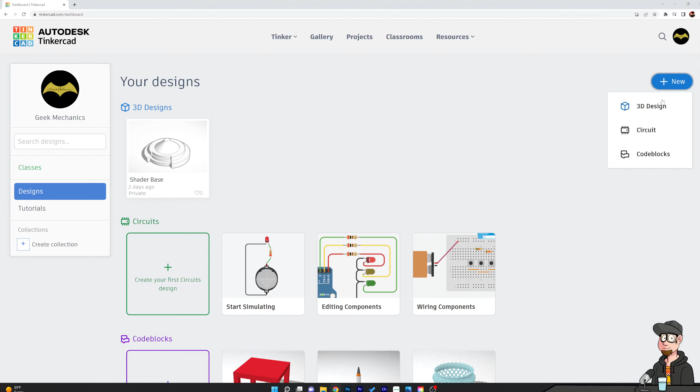All right, cool. So the easy thing with Tinkercad is there's a big blue button over here at the top upper right, and you just hit new, and we'll say 3D design, and you're right into the program. It looks like it's built for middle school. I think that's actually what they introduced this as.

But this actually has some really good functionality to it, and there's some advanced features. It's way easier than something like Blender, and once you get probably 5 or 6 concepts in Tinkercad, you can make almost anything. I've made so many complicated things in this. Then you take it and export it as an STL, throw it into Blender, and you can make something look really cool.

So, we can get into that too. I can show you guys how to do that so you can take cool shots of the models and stuff you make. But essentially, here you have a work plane down at the bottom.

You can go to settings and go to your units. Your units tab is probably set to millimeters. I have mine in inches, so if you want to follow along, you can switch yours to inches as well. If you're into Legos, you can go to bricks. I won't cover that, so just make it the default and close that out.

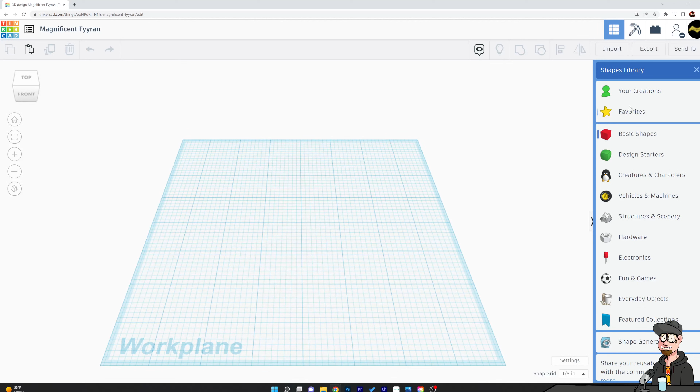And everything, for the most part, shape-wise, is going to be over here on the right. So you have your basic shapes panel, and then you have a drop-down menu that has a bunch of other options in it as well. This is where you're going to select all of your shapes, and we'll start getting into that. But for right now, we'll start with basic shapes.

And you have over here on the left, which is kind of important, your different views, your home button. You have this orthographic mode, which is really helpful, especially when you're trying to do stuff that would require math or lining things up. We'll get to those, you'll see me use them. If you have a question, drop it in chat. But if you've used Blender and other CAD systems, you will jump into this pretty easily right away.

So the big thing is, everything is a shape, right? So when I'm starting off, I'll look at something and go, oh, this is a door. I'm going to use a rectangle, and a circle, and this. I just break it down into shapes. And we'll start doing that by just grabbing your first shape here, which is just a square.

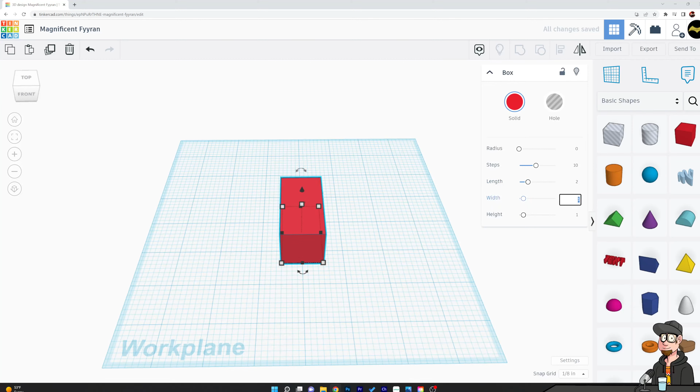You'll see the menu for this over here on the right that pops up is you have radius, steps, length, width, and height. You can set all of this by either using the dragger here, or you can click in there and type too. So we can go 2 by 2 by 0.5 to start off.

You can also grab these individual squares and move it that way as well—corners, etc.—we'll drag everything. If you want to enlarge the whole thing, you grab this top one, hold shift, and shift up, and it will do it proportionally with everything. Super handy and helpful to know.

Beveling isn't really an easy thing to do in Tinkercad. There's not really a way to bevel unless you're using this particular model, the square. How you can do that is set your radius, and then use the number of steps. As you zoom in here, you'll see that we can actually see a small bevel on the sides.

So just keep that in mind if you're looking to bevel something. Obviously the bigger the radius, the bigger you'll see your bevel. There's other ways to do that too, obviously, but that's the gist of it.

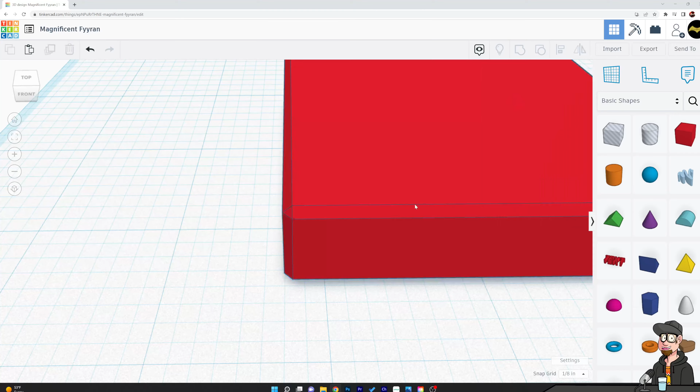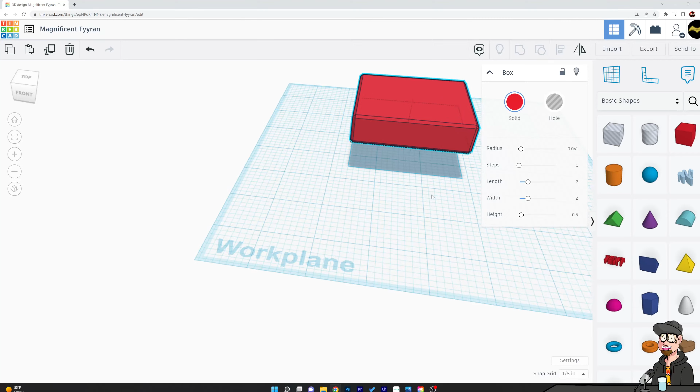That's how you bring in an object to move it around. You right click, select it, and just right click it, move it around. You have this workplane, which is basically your zero plane, and if you move something up and want to get it back down to 0, you can just hit this little button over here. When you start seeing these things right here, you got this 5/8, you got 0. You can just start moving this back down, or you can just hit 0 there, take it back down to the floor.

The big thing with Tinkercad is Boolean cuts are really easy, but you don't have many options, or at least it doesn't appear to. But let's say we wanted to put a square right in the middle of this. You would grab this square that looks like it's got the little lines through it, and they call this a hole, I believe. Just a straight up hole. And it does exactly what you think it would do.

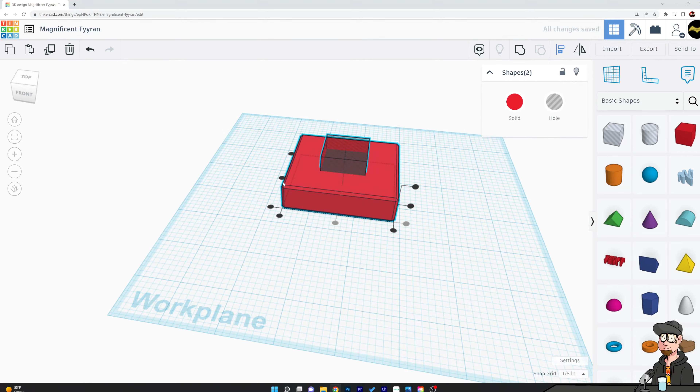If we pull this into the middle, let's say you want to line this up, dead center in the middle. Just grab both the items, go up to this align button right up here, click on it, select your middle, and now we have that lined up. The other thing we can do is go to this view, go to our top, and we can see that we're totally lined up.

To move the screen around without having the angle changed, you can use the middle mouse wheel. That's the easiest way to do it. Or you can also use shift and the right mouse button. I just use the middle mouse though.

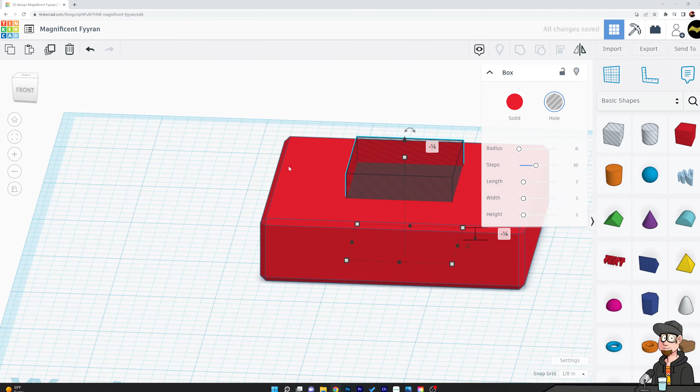Let's go ahead and make a hole in this. You can see that we're coming up through the bottom, but I always like to make sure that the cut is gonna really be a true cut all the way through. Pop out of that mode, grab them, and this is how you would make a cut. You go up and hit the group tool right here, Control plus G, or just hit group. There you go, there's our first cut.

How's that feel? Any questions on that?

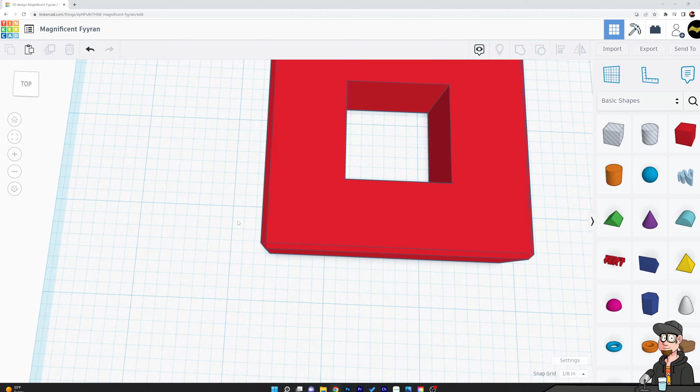Let's go ahead and delete this one. You just click on it and hit delete. And now let's actually make something. Let's make a floor piece, like from a Batcave or Cyberpunk or sci-fi or something.

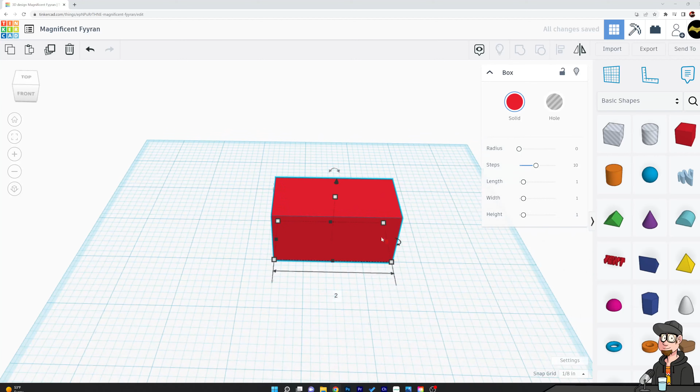I would start with creating a box. Let's move this to 2x2. Again, you can do that by dragging it up to 2, or you can just type it in there, either way. And then let's bring this down to probably like 1/8.

I'll show you a couple ways. Like I said, there's just like every CAD program, a million different ways to do this. Just because I do it a certain way doesn't mean it's the best way to do it. It's just how I do it as quick as possible. Honestly, that's my whole thing, I've just found the ways that work the fastest for me.

But let's say that we want to make this. Actually, I'm going to increase this a little bit, go back up to 1/4.

Let's say we'll make this into a floor panel, and I want the corners to be cut, because there's no way to do that in this program, you have to cut it. So I'm going to bring in this box tool and the box hole, set it there, and these little arrows here are ways to rotate the cube around. So when you want to rotate the cube, you can click it and get into the number, and I could say 45.

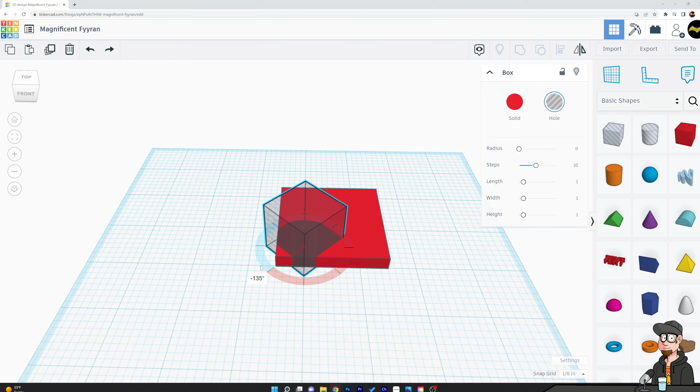I get a 45-degree angle that way. Or you can drag it, and if you hold shift, it'll snap to 45 degrees as you go. You can do that for every direction, X, Y, and Z.

I'm going to move this back, somewhere around something like this. Let's look at that. That's not very big. One of the problems is right now it's snapping to 1/8, so I can't really get it the way that I want it.

If you run into that, you can tell the program to snap in a different scale. So I can say, let's snap in 1/32. Now you can see when I move it around, I have much more control of how I want that to look. So just eyeball it however you want to make it look.

And then you want to make sure that it's centered and all of that, so you get even cuts. But I'm going to go for there, and I'll show you the trick that I use to do this on all four sides. There's two ways to add an object in Tinkercad.

You can duplicate it, or you can copy it. If you copy it, it's going to move it to a different location. Like if I control copy this, Command C and then Control V, it moves it. If I just use Command D, it's going to place it exactly where it was.

So I'll do that. I did that once. I'm going to do it again. So there's 3 copies there now. I'm going to do it one more time. And now there's 4 copies there, and I'll show you why.

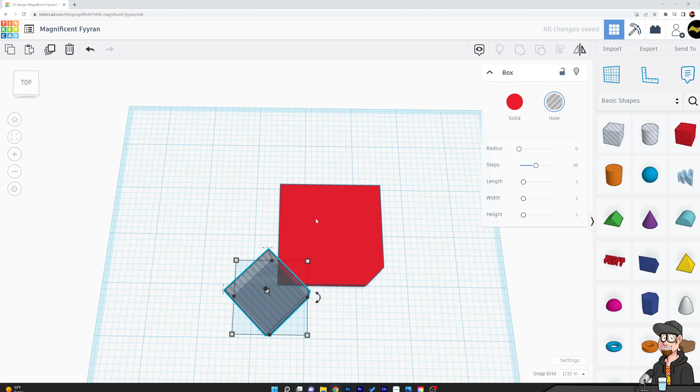Now I'm going to shift this box rather than messing with all the cubes because it's a little bit easier to control. Now I'm going to take the next box, select the red platform again, and do the same thing.

And I'm going to do that again. And one more time. This time, what we've done is we've guaranteed that they're going to be the same cut, as we don't have an alignment issue later on.

I don't love math, so that's the way that I do it. You can bring the ruler out and get into using the work plane, and I'll show you guys that, but probably down the road. I know the best way that I learn is just making stuff and figuring stuff out, so I just want to get you to where you guys can start playing around in this.

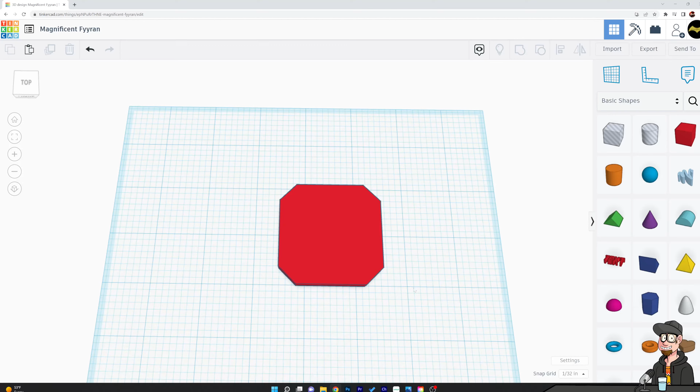So now we have this shape, and let's make it interesting. Go ahead and grab or click on this, select it, and then duplicate that, Control D, and we're going to bring it up above, and we're going to turn this into a hole.

Now we're going to select this top box. So you got your four sides, 4 corners. This top box is going to let you make something taller or whatever. But what we want to do here is we want to shrink this whole thing in.

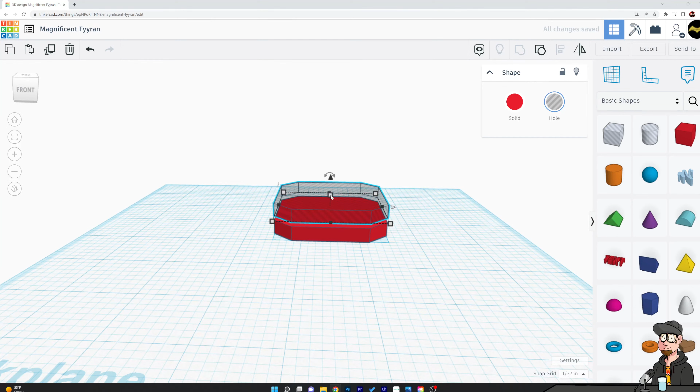The way to do that is hit Shift and select that box and drag down once till we get something like this. So we go to our top view. Perfect.

Now let me jump out of there. Oh, by the way, if you ever get really lost, the home button is really good at just getting you right back. Super handy, especially when you start having tons and tons of models on your work plane.

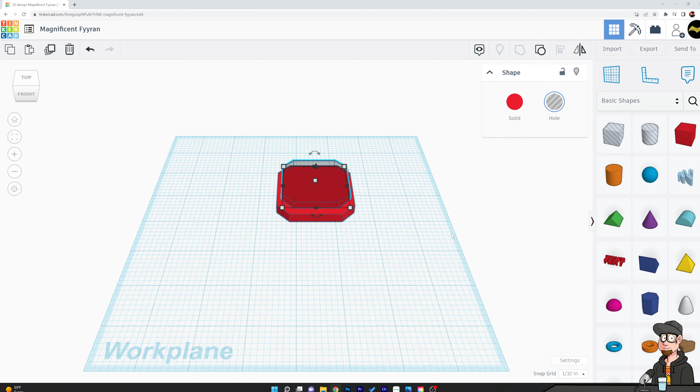All right, so now we have this. Let's go ahead and drop this in a little bit. It's kind of difficult to see. That's one of the disadvantages of Tinkercad, is you can't really see how far you're going in.

You can see it via the numbers. You can tell, hey, I'm dropping at 1/32 because that's what I'm snapping to. So if you want to get it right above and snap it in to 1/4 of an inch, you can always go and change this to 1/4 of an inch. And then when you drag it down, you're going to drag it down 1/4 of an inch. So that's one way to do it.

I don't usually do it that way. I do most everything just by eyeballing it. So I turn this into a hole as well so I can see what I'm doing from the side like this. And then I just take it down to where I want it. Let's say right there.

And then I'll just take this and turn it back to a solid and it should be ready to go. Select both of them and group them. And let's say you mess up and didn't want to do that. You can use the undo button, but you can also grab the object and go up here to the ungroup button, and it does the same thing. It just brings it right back one step to where you are.

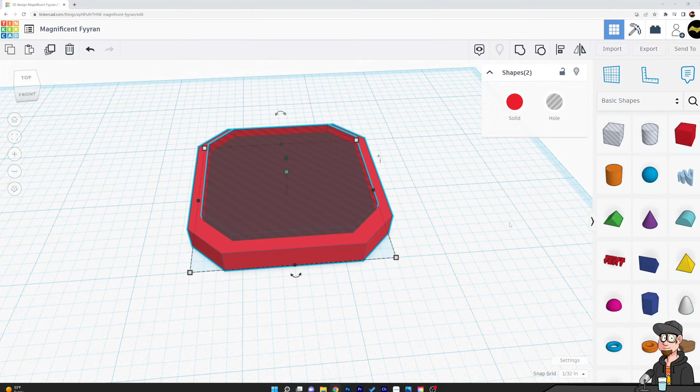Now, if you have multiple things, like if I've made this cut and another cut and another cut, and I keep hitting undo, it's going to keep going backwards, and Tinkercad goes pretty far back. I don't know the exact number of times, but it's pretty far. I think it remembers like 30 moves. So anyway, grab those, combine them, and now we got this floor shape.

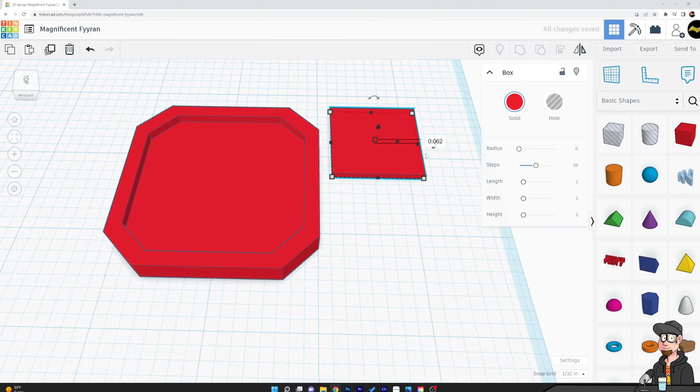All right, let's keep rolling here, and let's say we want to make this, like I said, a sci-fi type panel. Grab another square, and I'm going to shrink this one down quite a bit. We don't need it to be that type of height. And shrink it into something like this, extend it out.

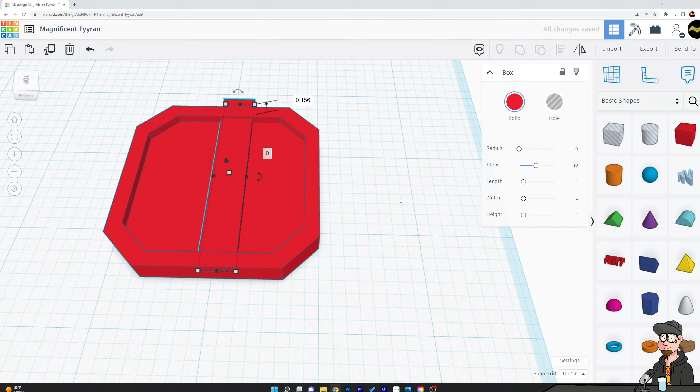Bring this over to here, lift it up. That's the other thing, the controls are a little bit weird. You can use the arrow keys quite a bit to move things over, right, left, right, and I can even move them north and south. But to go up and down, primarily you're going to want to use the arrows, and that can be a little bit frustrating at times.

But I guess that's what you get for using a junior high program to do all of your 3D modeling. But let's just take this, and another thing I like to do is I don't like really working in red, I like working in one of the grays. So you can select everything, go to solid, and then you can change your color up if you want to. I just see this better for whatever reason.

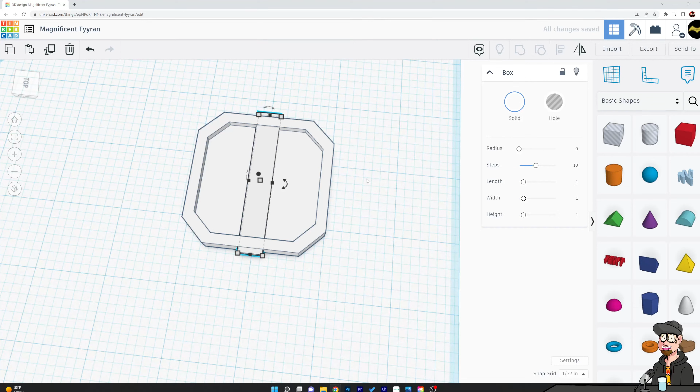And I'll take this, select both of them, go up here to my align tool, align it in the middle, align it in the middle. I'm going to go back and deselect all those just by clicking on the work plane, grabbing it, holding shift, going 45 degrees, and turning that to the corner.

And we have a little X. Now I want to do that again. I'm just going to duplicate that one, Control D. And now I'm just going to mirror this.

So there's another tool up here. You can just hit M, or you can click on this guy, and it will show you the different ways you can mirror this, right? So you can go north, south. You can go X, you can go Y. And obviously here we're just going to go to the X plane, and we've got that now duplicated.

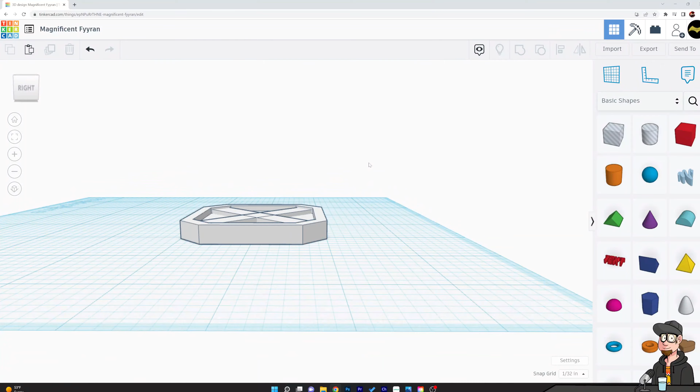So you should have just an X right now sitting in our shape. The cool thing too is, Mike, I know you're in here.

You can CNC route all this stuff as well. I've done it, and it does really well. I don't know which program you use for your software, but you can throw it as an SVG, export it as an SVG or an object file depending on what you need.

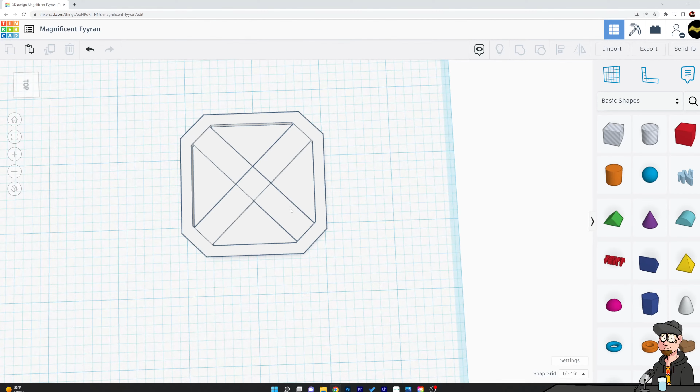But grab these guys, and now we got the X. You guys are following along? We're good. I would go and grab another one of these guys. I will this time copy it. So Control C, Control V.

Rotate this back so I'm on the same plane, 45 degrees, and I'm just going to turn this into a box. Bring it right up in here into the middle. I don't want it to be quite that big, something like that. That'll work, whatever size you decide to go for.

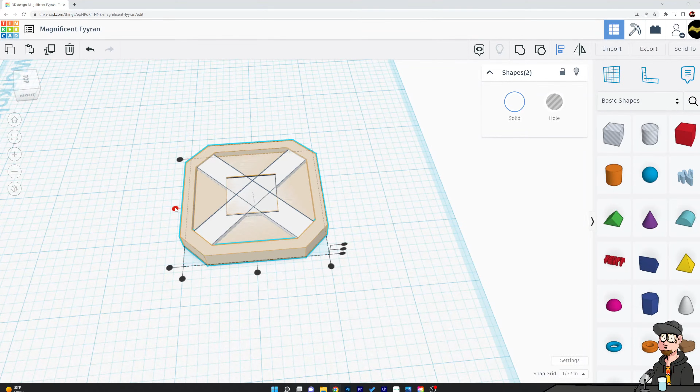I'm going to grab it, go ahead and grab the outside object here, and I'm going to align that up to make sure that we're centered. And we are. And then I'm going to combine these. We have done that actually. But I'm only going to combine 3 of these because I want to move them around, and I might want to edit them a little bit later.

So I'm going to grab the X, select the left half, the box we just made. It'll tell you up here how many shapes you have that you're going to combine. 3, that's what we want. We combine it. We should see a nice even shape now because they are all flat in the same plane. So you should now have a really cool looking X.

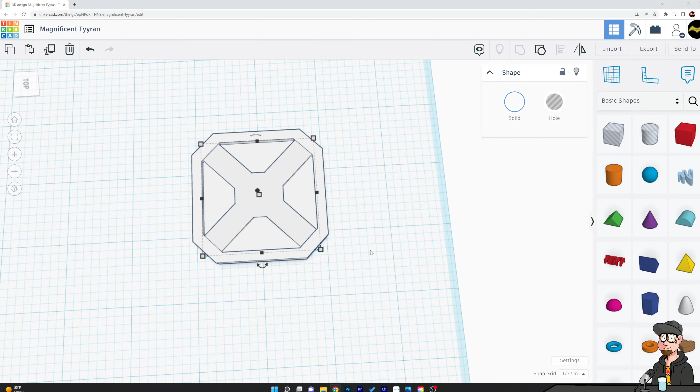And right now, if I 3D printed this, I could print a bunch of these out, slap them on some foam, and I would have the beginning of a floor. I can grab this, grab everything here, and duplicate it, and you can kind of see we can just build this thing out.

There we go, we're in. I have built full dioramas in here before, the layout of them with the scale, just to get a visual of, like, oh, is this gonna fit? I don't know, let me go check.

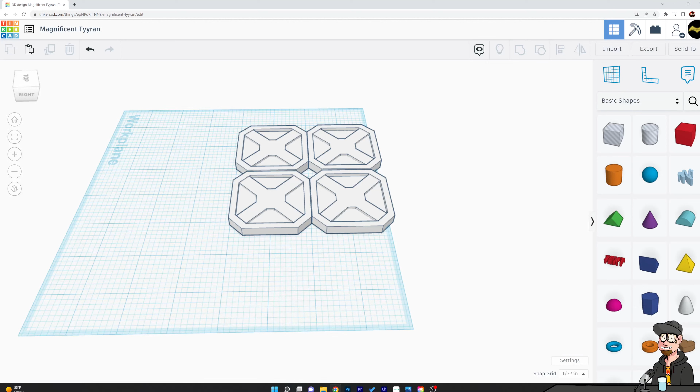But we're gonna keep going, we're gonna make this cooler. Get rid of these three, and that, and we're gonna grab the cylinder, bring it down.

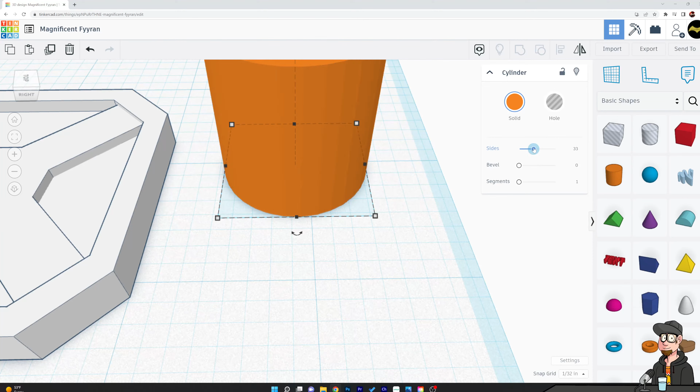Cylinder has sides and segments. Sides are exactly what you think. If you zoom in here, you can see these little segments or sides that make it all up. Just grab it and get it as smooth as possible. You can bevel these, they do pretty well beveled. The more segments you add, the smoother the bevel will be on the top.

But we don't really need to do any of that. But we'll go ahead and do it. Let's just go ahead and we'll bevel it right about there.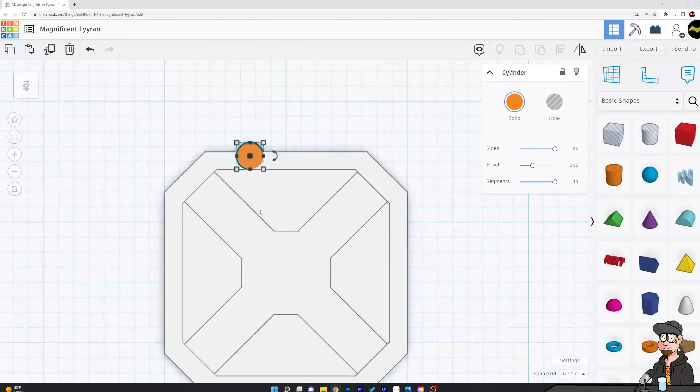And then I want to make these a lot smaller, so I'm going to bring them down and make them a little bit taller. Grab this guy and drag it over and see how much smaller I need to make it. Go into my top view. And you can see I need to make it quite a bit smaller, so we'll do that.

Oh, I lost it, bring it back up here. Here we go. And I can position this now. Oh, maybe. I don't like the way that snaps, so I will change this to 1/64 and see if I can actually get it lined up. Sometimes it won't. I mean, that's pretty darn close, but sometimes it won't, so you can just turn it off, and then you can go to real small measurements there. I like it right there.

Another trick is if you're wanting to repeat the same thing over and over again, it's easy to do. Select the object, hit duplicate, Control D, then go ahead and move it. In this case, if you use Shift and one of the arrow keys, it'll go more. So I'm gonna Shift and right arrow key over 1, 2, 3, 4, 5, 6, 7, 8. I don't know, just a bunch, so it looks right to me.

So let's say right there. Now, if I hit Control D again, it's going to go ahead and make the move for me, and I can keep doing that if I want to, to use the same spacing. So if you ever need to do something that has a pattern to it that you want the same spacing each time, you can use that. You can duplicate it, move it, and then duplicate it over and over from that spot.

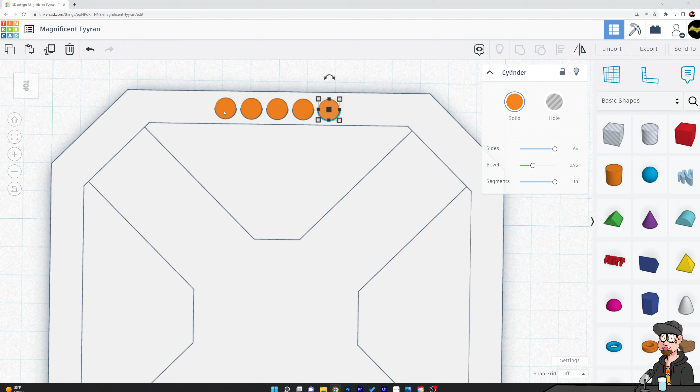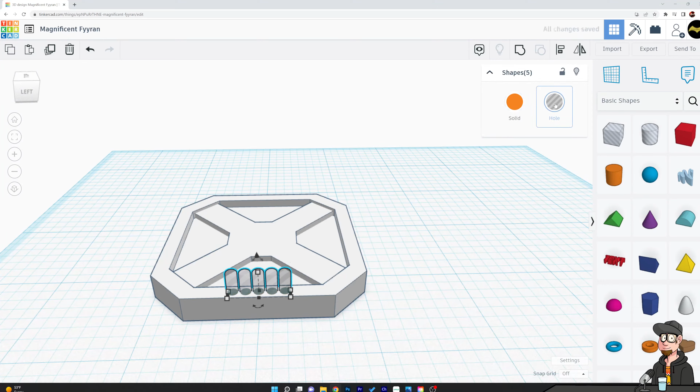So for these guys, I'm going to go ahead and move this to the other view. Grab all these, and we're going to turn these into holes. I'm going to grab this one, turn this into holes so I can see how deep we're in here. Grab all those guys, and we're going to move it down a little bit. We want it to be somewhere like that. Turn it back into a solid.

And now we can grab, I don't want to grab the X part here, because that's still separated. I want to grab just this, so I should have these 5 plus one more, so I got the 6. I'm going to go ahead and combine those. And now when we spin, we got some holes in there.

If you guys are following along, are you with me? Are you where I'm at?

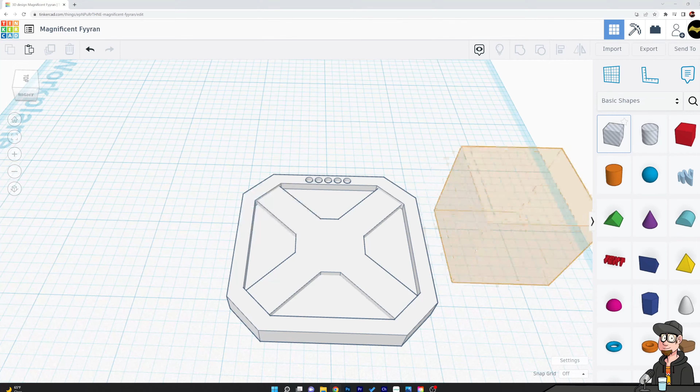I want to make this a little bit more sci-fi looking, so I'm going to grab another square, put this one right on the plane here, size it down somewhere in there, and make it a little bit more interesting, more like a rectangle.

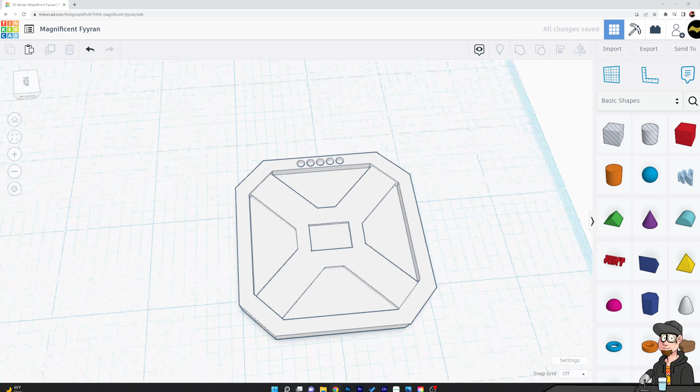Grab the hole, grab the outside object, align this into the center. We'll just eyeball this one - let's say right about there. And we'll grab the cross this time and group it. Now we have this cutout centerpiece.

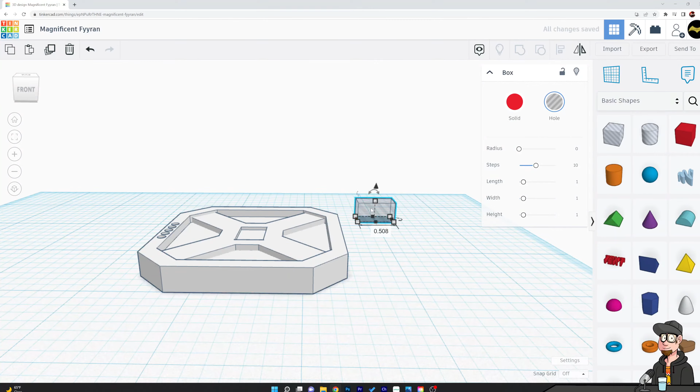I want to add one more little bit to it, maybe two more. Grab another box, another hole box, and let's drag this one out a little bit. I don't care what size it is as far as the height. Let's just make this like an internal cut, so I'm going to drag this in and drag it up so it doesn't cut into the actual floor.

Something like this, you can kind of see where it's at. We're going to lift it just a little bit. Remember, we're going to 3D print it, or we're going to carve it, so we want to make sure we have solid walls. You can make your walls too thin and you'll kill your 3D print, or mess up your router bit.

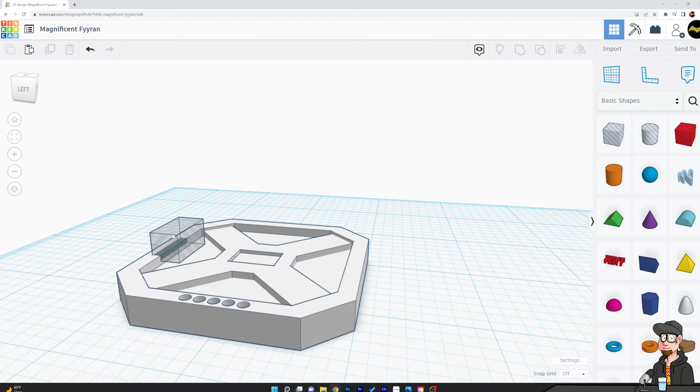I'm going to grab the outside object, hit combine, and got a cool little thing in there. Like I said, if we added this to the 3D printer right now and printed it out and painted it, it would look already pretty decent and pretty sci-fi.

Now we pulled this up in Blender just so you can kind of see - if I modeled this out, rendered this out, it looks very sci-fi, very techy. Move it around, you can see the shadows and stuff a little bit more. So if I print this out, which I have, I've made these and printed them lots of times. They look super cool, especially when you paint them and weather them any at all. They really stand out, they look sharp.

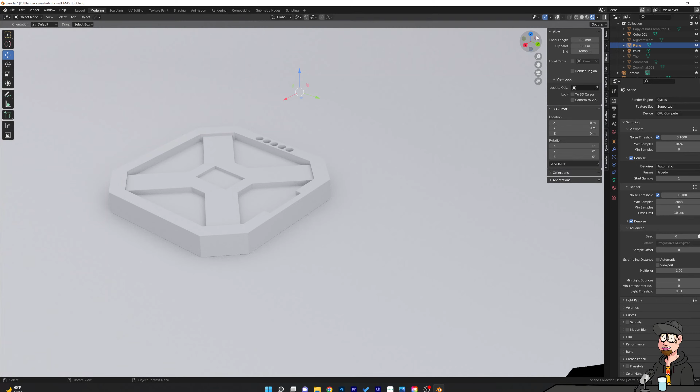The cool thing about Tinkercad is there's no vertices, it's really difficult to get holes and stuff in the model. For 3D printing that's a real problem, right? Your model has to be waterproof, so you want your model to really not have any holes in it whatsoever. If there's even a small spot that could take on water, it will fail as a 3D print.

So that's the great thing about this - you can throw this into a Chitubox or Lychee, slice it up and print. This will probably take about 25 minutes to print. I have no idea how long it would take to actually route out or whatever.

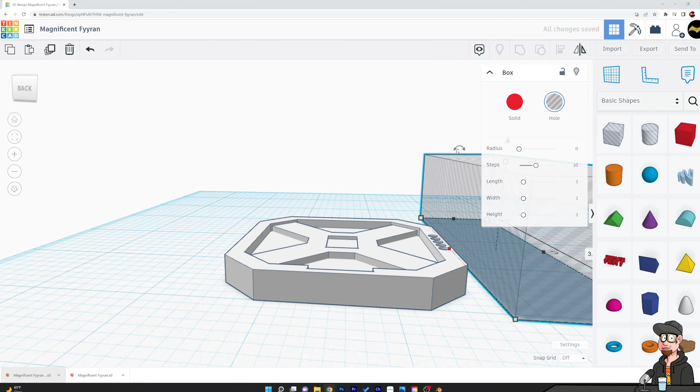And the cool thing is if we wanted to shrink this, there's a couple different ways to do it. You could grab it and shrink it, bring everything down - if you didn't like the thickness of it, but it's going to change the depth of it though. So if it's just too thick, I would just grab a hole and make it the thickness I wanted it, obviously leaving some room for that. I'd grab them and slice it.

I've printed this in both a resin printer and on my Ender 3. Prints pretty well, in both cases it prints pretty well.

Steve says you can print with either. Yes, you can, and that's the great thing about this program. It doesn't care, it's just going to provide you the STL.

There is another menu, or another shortcut. If you have something up in the air and you just want to drop it down to the floor, you just hit D and it'll drop it back down to the floor.

So if something is manifold—if you follow me on Instagram, I actually get really upset by this topic—something that is manifold means there are no holes in it. Imagine if this was submerged in water. If we took this model and submerged it in water, as long as there's no possible way for water to get inside of the model, you know it will print correctly. That's called being manifold, or waterproof is a good way to look at it.

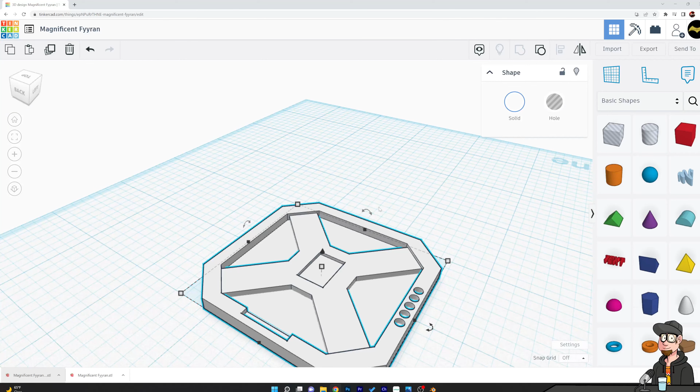So I will make this panel available. We could do lots of other things too. We could go back to where—let's do it, why not? We could go back to grabbing this. I could undo what we did before. See where it undid the last step.

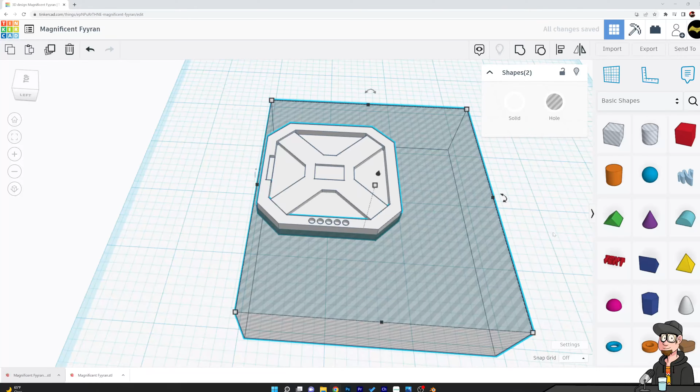I really wanted to undo the next step, which is where I combined this little middle section. So I'm going to have to do that again, to ungroup. And there, I think it's where it worked. I just hide this and leave—you can just hit H or the little light bulb here. That way, when you need it later, if you want to do the same step, you can still do it.

So now I have this where I can move this out of the way. Let's move this out of the way and let's put a pattern in there.

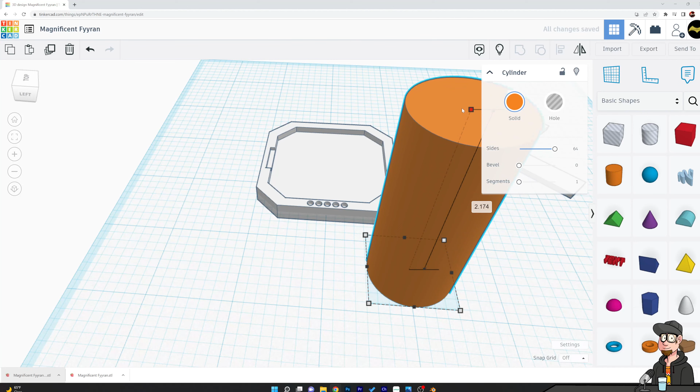Let's grab a cylinder, let's ramp up the sides, let's make it a little bit taller, so we can go ahead and hold down shift and bring these down. Let's make these pretty small, and we'll bring them into the model here. Now let's zoom in here just a little bit. Let's say I just wanted to make a cool pattern in here. Let's see, am I actually in the model here? Okay, I am, and I would just kind of see, okay, we want to probably be something like that.

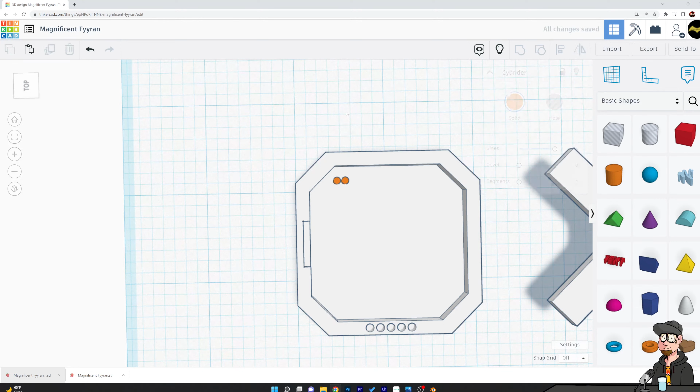Well, let's say we wanted to make this a cool pattern. I can grab this and let's move it over here—good starting spot. Again, Control D to duplicate it. Don't deselect it, I'm going to hit Shift and right arrow until this moves over. Nope, not enough. And still not enough.

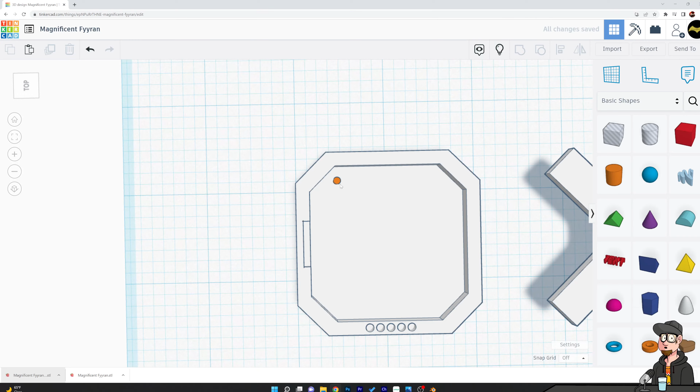Let's say we want it to be that distance. Now I can grab this, and it didn't work—because I deselected it a few times, when it duplicated this one, it duplicated it right on top of it. So what I should do is delete that, grab this one again, zoom in, change my angle a little bit, grab this, Control D, this is selected, hit Shift, move it over to where I want it from a spacing standpoint, just like this. Now I can go back, zoom out, move it around, and I can hit Control D, and I have my pattern all the way across.

And I can grab all of these little guys by clicking and holding Shift, select them all. You'll see a tiny little blue ring that comes around them. And I'm going to combine these—so I have 12 shapes, group them, and now I can move these around.

Let's say I want this pattern right here. I can Control duplicate these and move these down now. So let's say there, and move it to the right.

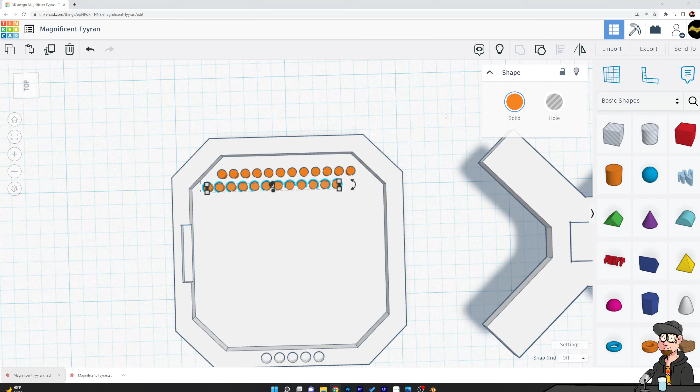Something like that. I can undo this. I'll grab just this guy right here and duplicate him. Let me go back in here so I can actually see it again. Move this guy over to say there, and do it again. Finish that pattern off.

Check that—probably a little bit over. That's pretty close. Now you can grab all of these again. Sometimes it's hard to snag them all. And then I'd grab this top branch as well.

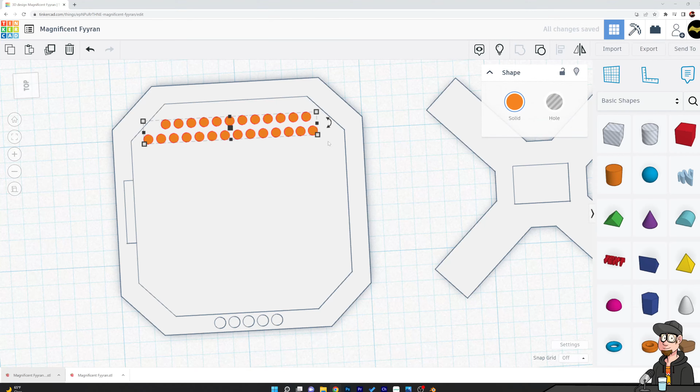Combine that into its own shape. Now we can duplicate that, move it down to where we want it. Let's say right there, and fill it all the way down.

I'm going to select each one of these groups, and I'm going to combine all 7 of the groups. I'm going to go ahead and select the outside box, and I'm going to align these to centers.

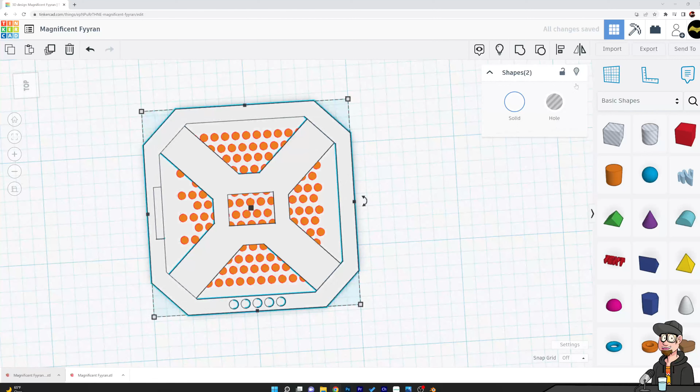I'll grab this guy right here and move it back over to where he was. We'll drop him down something like right on top of those. Make sure he's lined back up, so we'll do the same thing—we'll align him. Something like that.

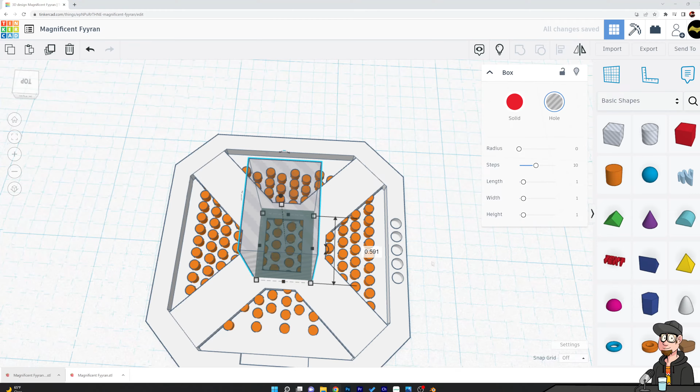Then I'll clear these out because I don't want them in the middle of this little design element here. Grab those—doesn't matter on the box how far down you have it. Grab this, then grab your little orange circles, combine those, and it should get rid of the ones in the middle.

It's taking a little while now because we've got some geometry on the work plane. Just give it a second, let it work itself out there.

Not perfect—obviously I would move this around and clean it up. I'd go in here and add some of this stuff, but if you wanted to add those little markers in there, you certainly could change them to white.

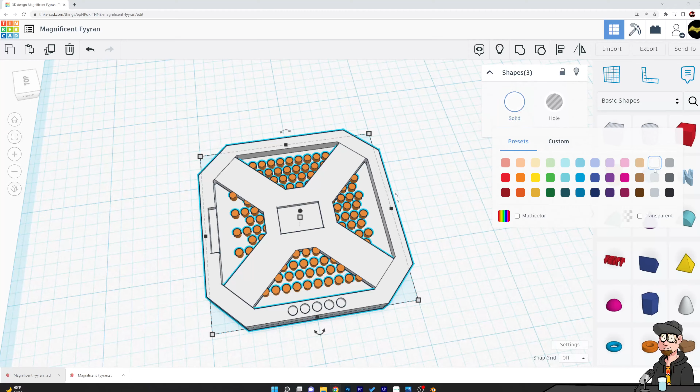And if we wanted to fill these out just a little bit, we could too. Could just move them over to the corner, something like this. Grab them and move them down. There we go.

And like I said, if we wanted to lay this out to see what it would look like, we know we have our plane here, our workspace.

Move this down and duplicate that. Hit shift while you're moving and it'll move in a straight line. Grab these guys, duplicate them, do the same thing—shift while you're moving them up. And now if I duplicate, I can continue on. Now we just build a walkway.

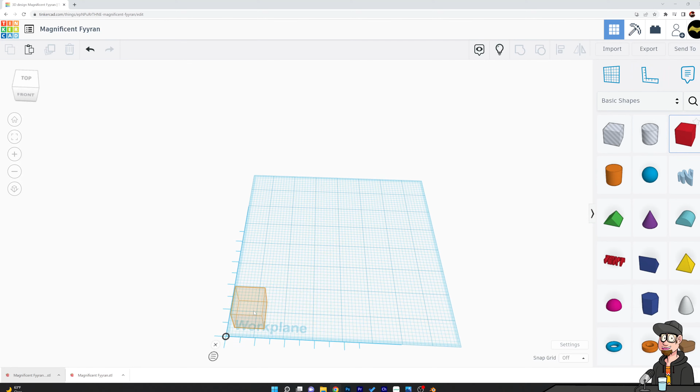It's a super powerful tool. Drop it in there in the corner. Bring your door in, or your block in. Am I in the wrong view? No, and I'm just gonna eyeball it. But let's say your door is gonna be, like, 6 whatever by...

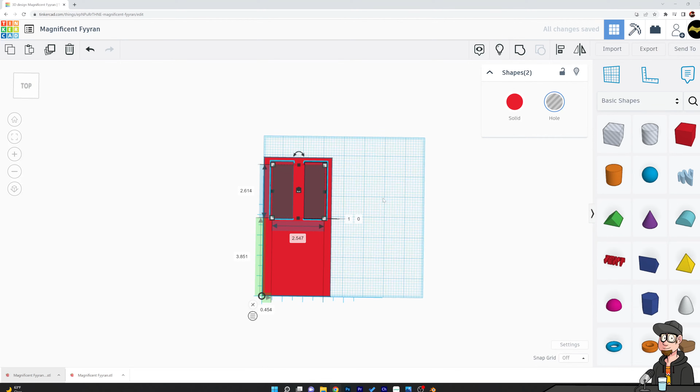Something like that—let's say that's the shape of a door. Obviously you're gonna thin this out or whatever. And then you can make windows. If I wanted to make windows, I could simply grab squares, bring the squares over, drag them to whatever position I wanted, duplicate that, line those up to where they were—pretty close. Do the same thing below.

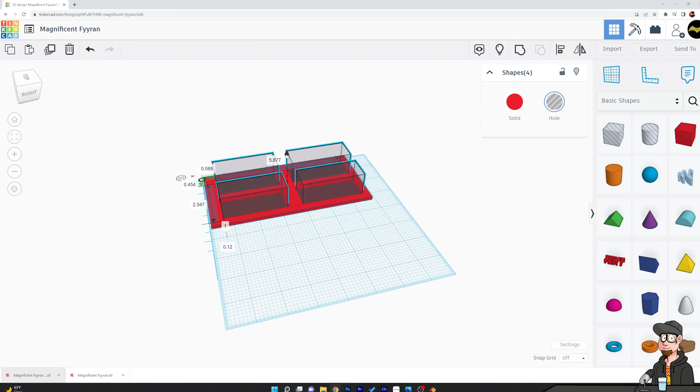I can make a window that way just by cutting it through, or I can grab all 4 of these and raise them up to something like this. Grab my door, and now, bam, what do I have? Now I've got a designed door.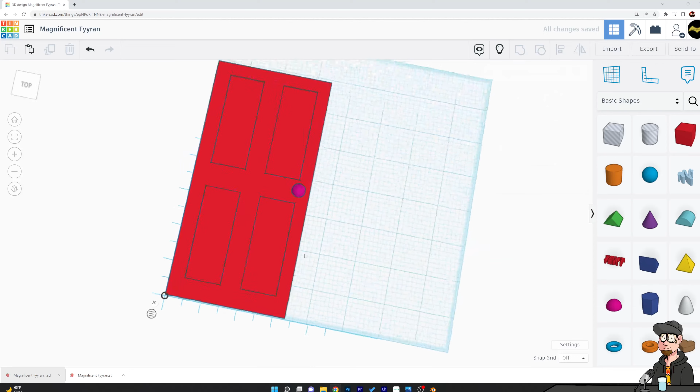Adding the other stuff is just as simple, right? So here's the shape. Obviously, what does that look like? It looks like a doorknob to me. I can grab this and bring this up, bring a cylinder behind it, move this in there, scale that, and line these two up.

If I can actually grab them... small electrical box for a warehouse. Other things, oh yeah, this will totally let you do that.

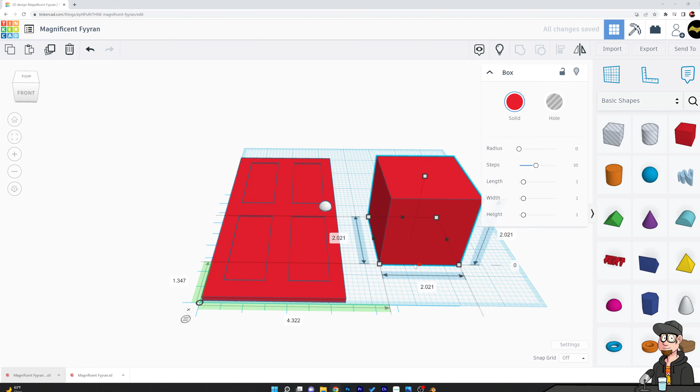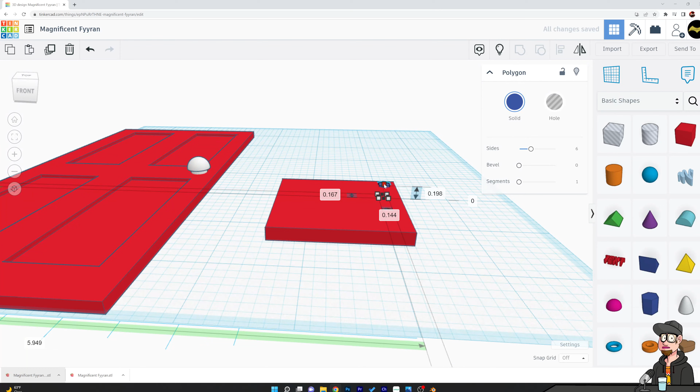The cool thing is, play around with some of the stuff they have. Like they have an electrical box, right? Bring this down. They already have some of these pieces. Like, hey, I want the little bolts on the side. Great, you already got the shapes for it. Bring this bad boy in, zoom in there, bring your bolt down to your corner, something like this.

Duplicate it, bring it down, grab both of them, duplicate those, drag them over. You already got you're all started. If you want to add the box for it, something like that.

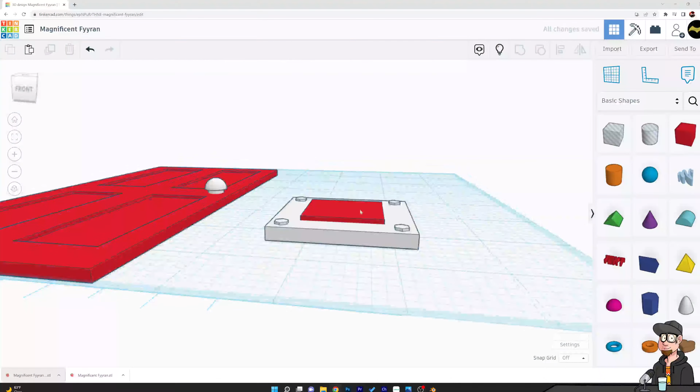The door, as long as you know how to use the align tool, line it up, make sure that you'll have to give it enough depth in order to make it look like a door when it 3D prints, because obviously it looks bigger on screen. I'd always say like 1/8 of an inch, something along those lines, will make it look the way you want it to.

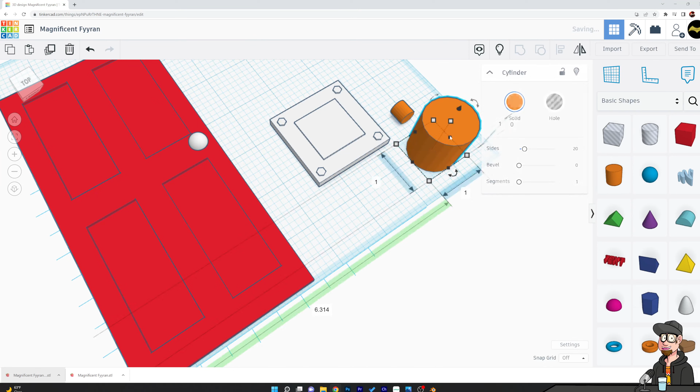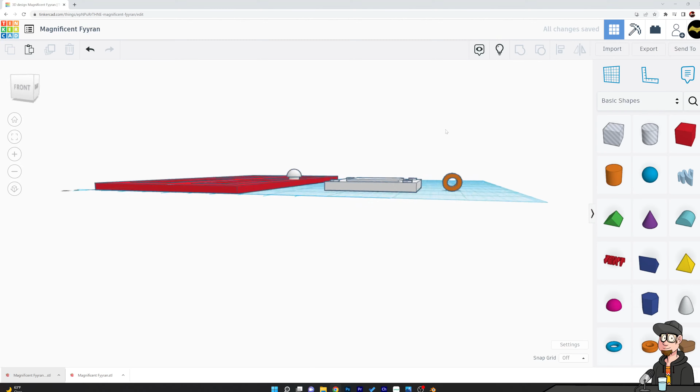There we go. You want to make a hinge, easy to make a hinge. Grab something like this and turn it on its side, shrink it down, grab another one of those, pull it on its side, shrink it way down, make it super long. Grab those and line them up. Make sure it's lined up in the center of the top. Turn this one into a hole. Grab those two, combine them, and now you have it.

How do you save a file and start a new one? It's automatically saved, that's the crazy thing about Tinkercad. If I leave right now and go up here to the button on the top left, you can see that it's there. I can hit new one right now.

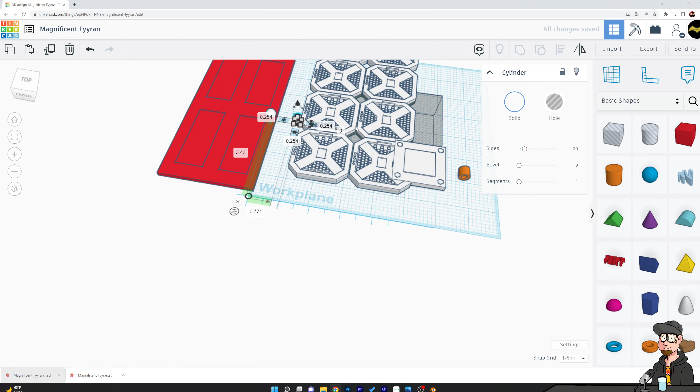The other thing that's cool is I have this set to private, and what I can do is if I go back in here and tinker this, and I unhide - well, I guess it automatically unhides that stuff. Grab this door and move it over. I might get rid of this, I'll just go ahead and get rid of it.

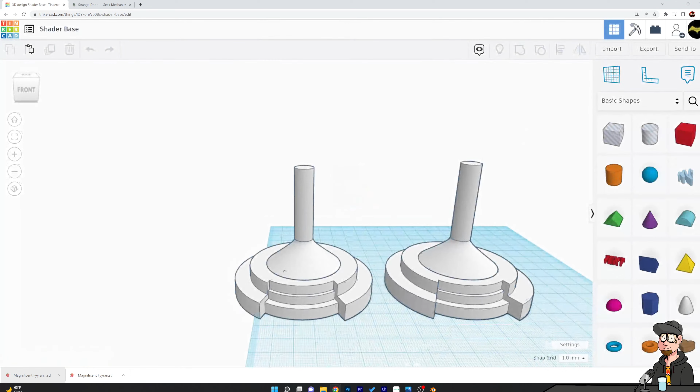So I would encourage you guys to just play around with it, and then save it out when you're inside the program. When you want to save one of these out, just grab it, go to export, and export it right out.

I don't know how long I'll do these. I don't know if this is a program you guys will need a month's worth of time to really learn, but I'll do it for a little while, as long as it's helpful. Then we can get into some other programs to do more complicated stuff, like organic type stuff.

Sometimes I make a base of a model in Tinkercad, then export it as an object file into Blender to do something very specific there. But a lot of the stuff you can do here, you can even texturize and texture stuff in here.

Yeah, this is a great tool, and I can't believe it's free. That's the great thing about this - you're just in a browser, anywhere you have browser access, and it saves it if you want.

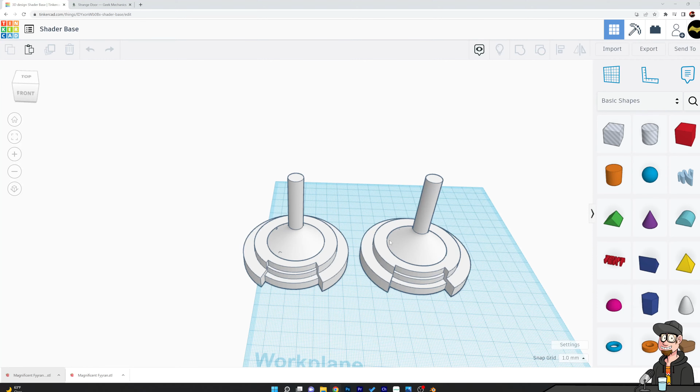Say I wanted to bring something else into this. There are other models on Tinkercad out there, so I could go look and say, I don't know, UFO Tinkercad. Let me go to images and see if someone has one. Here's a UFO - that looks cool. I can click it and copy and tinker this right now. So I can go ahead and say copy and tinker.

As long as it's public, right? I've got this, I can grab all of this and hit Control C, go back to Tinkercad, and there it is in my files now. Or I can also just bring the part into the part I was working on with Control V.

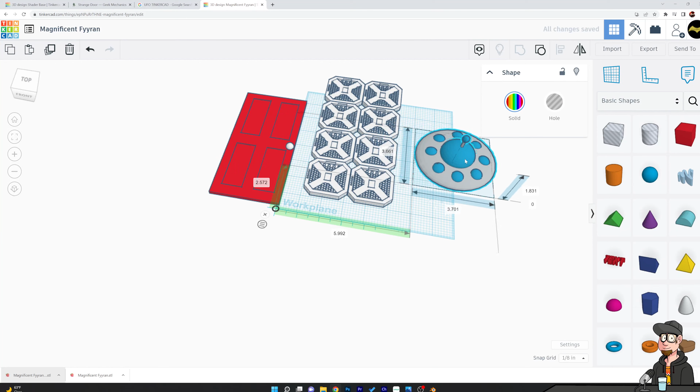So if that fits into something I'm making, you can bring it in. And the cool thing about it is it's not like Blender where someone would be like, hey, you used my X, Y, and Z. That's the whole point of Tinkercad - it's learning and using stuff. If someone makes it public, they don't mind if you use it.

But yeah, that's how you do that. So you can do textures that way too. Let's say you want a rock texture - obviously Tinkercad doesn't have a rock texture, but you can go find an object file or STL file that has a texture on it just by Googling it, finding it, bringing it in, turning it into a hole, inverting it into your shape, and cutting it. I've done that plenty of times as well.